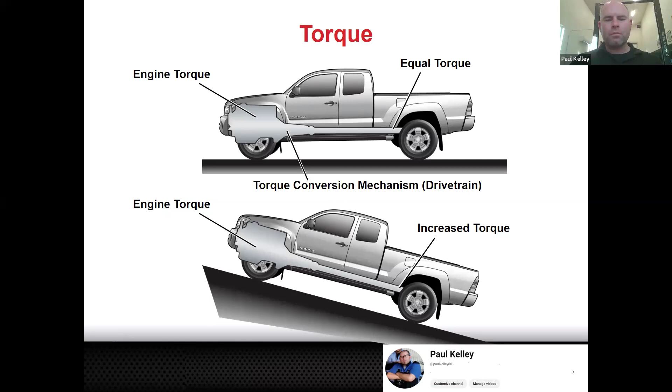If you look at first gear in that Tacoma example, if we had 36 teeth on the driven gear and 9 teeth on the drive gear, you could literally just count the teeth up - they all look the same, so you might need to make a mark on them and then count them up. You do 36 divided by 9, you'd come up with 4. That would be a 4-to-1 ratio, meaning your engine will turn 4 times before your output shaft to your transmission turns 1 time. So who remembers a little bit what would be the benefit there?

Engine turns 4, transmission output turns 1. That's extra torque—4 times the torque. But in physics, you don't get anything for free. So if you've got 4 times the torque, what did you just sacrifice? The speed. So now you have 1/4 the speed.

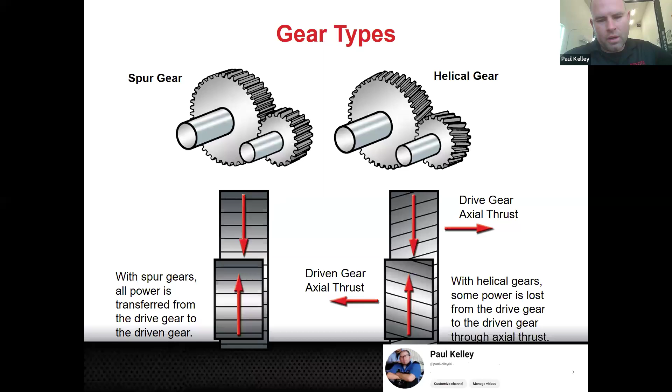And there's another type of gear - mostly we talk about it in differentials, hypoid, but we'll cover that when we cover differentials. Transmissions generally don't use a hypoid gear, a little bit different.

And then you got the split needle bearing, which is essentially the same as a needle bearing, except when we assemble the transmission main shaft, we don't have a real good way to always slide the bearings into place. Sometimes there will be a boss or a built-in gear on the shaft, and you couldn't get the bearing over the gear. So instead we use a split bearing, and it goes around the gear and then comes on as a split.

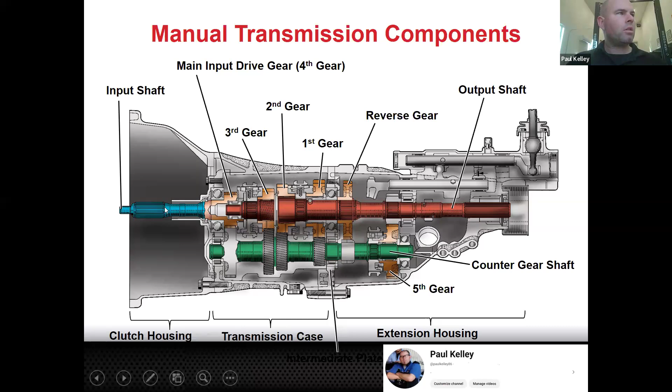That's why I like this picture, because you can see it stops right there, right at this bearing. And then actually right behind fourth, this is the bearing, and then there's fourth. It's kind of weird, it stops right here but it's sort of hollowed out. So this output shaft is sort of going inside of fourth, but it's not really touching fourth.

Fifth, however, is not actually. Fifth is on its own split needle bearing, and fifth has its own sleeve, its own synchronizer sleeve. So fifth gear would be the only one that's actually the speed gear on the counter shaft. So in fifth, it's a little backwards. Fifth, this is the speed gear that we select, and then it turns this fixed fifth gear that turns the output shaft. So it's kind of weird, but actually that's pretty typical. And then they might put on a 6-speed, fifth and sixth down here on the counter shaft.

But if you were to look at this, remember power flow would come in because the clutch is splined to the input shaft. That's your input shaft bearing. This fourth gear turns your counter shaft. Your counter shaft's got its own bearing here, it's going to have multiple. And this one's turning its own speed, so all these gears are matched. This is fourth gear speed gear, and this is fourth gear counter shaft gear.

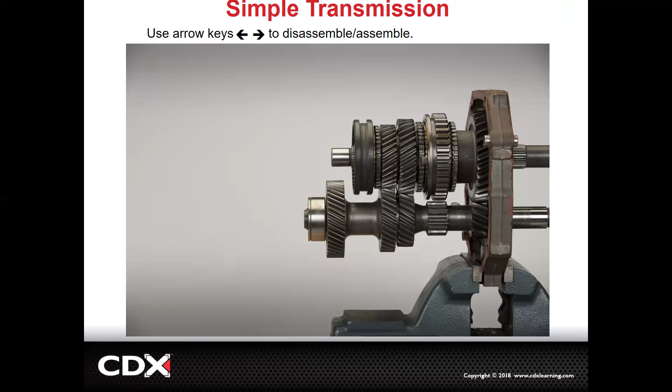And during disassembly, this is exactly how we're going to take this apart. We took it off simply because we're disassembling this one. So let's say, for example, you need to change, whatever. Let's say this is third. If you need to change third, this is what you need to do. You need to disassemble the transmission like this. So we're really just walking through the disassembly, but at the same time, I can explain a little bit about the pieces and how they work as we're disassembling.

That's why we pulled the input shaft, which also, by the way, has that fourth gear. So fourth gear is kind of weird. Fourth gear doesn't necessarily rotate on its own bearing. Remember, that's what I was saying. First, second, and third are good examples of those split bearings being used. But fourth gear is attached to the input shaft. It's just not attached to the output shaft.

So fourth gear turns the counter shaft. Counter shaft spins at whatever speed it spins, which spins all of these gears. Third, second, first, it's back here. Cool.

And then we pulled the input shaft. And then look, now we've pulled, well, what have we pulled there? We pulled, this is called a sleeve. We're going to come back to the sleeve, but now when we talk about the sleeve, you can picture it. The sleeve would be moved by a fork. So the fork slides the sleeve, but also beneath the sleeve, there's another thing called a hub. And the hub, you can see these splines, you know the hub is off because the hub splines to the output shaft. Okay, so we pulled the sleeve and the hub.

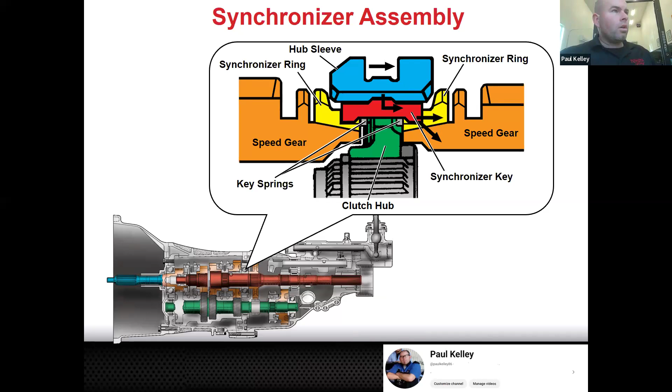The animations just can't play those. Okay, so if we were to take that, we're going to go back and forward a couple times. So if this was first gear, you can see this first gear, this is how we get our gear ratio. This is the speed gear teeth.

And then right here, see these little pointy things? Those are the dog teeth. And then right here, there's a nice cone clutch surface. That really clean cone-shaped surface is what will accept this synchronizer ring right here. When this synchronizer ring is shoved onto that cone clutch surface, it's going to make that speed gear turn the speed that it should. It's going to synchronize it.

Cool. Remember what the keys do? The keys kind of shove the synchronizer ring. They also have a little spring on them trying to expand them. And then this is where it gets a little tricky.

The hub in green sits in the center, and the sleeve can slide either way it wants. The sleeve can slide over the hub, press the synchronizer ring, and then grab the speed gear, at which point first gear is locked to the hub through the sleeve. That's first selected.

Then if you wanted to select second, you'd actually move the sleeve to the left. It would let go of these dog teeth, push on the synchronizer ring, synchronize the speeds, and then ultimately grab these dog teeth, which they'll call the splines. And that would therefore lock second to this hub, which would mean that the shaft will now turn at the second gear's ratio and speed.

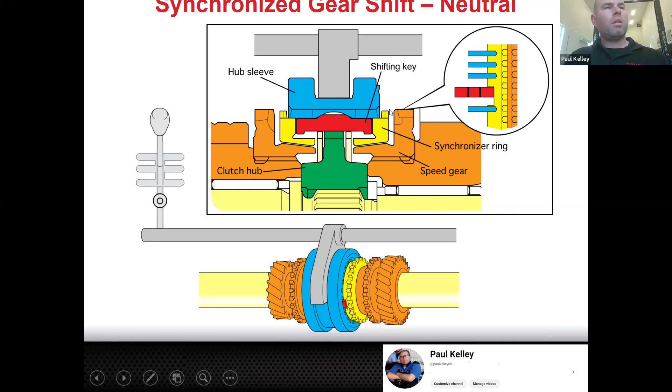Okay, so you guys could see that sleeve ultimately, through the key, pushes on the synchronizer ring, synchronizes the speed, and then ultimately the sleeve ends up way over here, grabbing onto those dog teeth. Make sense? You could see that? When it grabs the dog teeth, that's when that speed gear is locked to the hub, which is splined to the sleeve, to the output shaft. Okay, that's how it's selected.

Cool. Now there's a couple little details. One, right here, you want to notice when we're pushing on it, you can see that speed gear is in orange. The sleeve has teeth on it, and they put a little chamfered edge on here.

And that's basically so that when you bring this hub into position, it might actually bump the synchronizer ring, and it actually might bump the dog teeth like this. Like you go to shift and it's like this, you're bound up, gear bind, boom, you can't shift. If you ever have a car and you try to shift it and you go into that gear and it feels like you're forcing it, this is why.

You might just have had the sleeve tooth come right into contact with the synchronizer, right into contact with the speed gear dog teeth. But they put a little chamfer on there so it'll basically knock it down to where it needs to go. See right there? That can take a bit of effort. Initially they're gonna hit and they're gonna be like, uh-oh, but then they have an angle on them, so it's gonna go like this. There you go, there you go.

But you can feel that sometimes, that's normal. What somebody was saying yesterday, once in a while they'll go to shift and it'll kind of bind up, and then you might have to switch to another gear and then it'll go in better. That's because if you switch to, let's say this was fourth and you switch to third real quick and then to fourth, third a lot of times might spin this hub a little bit, and then the hub might line up perfectly with fourth.

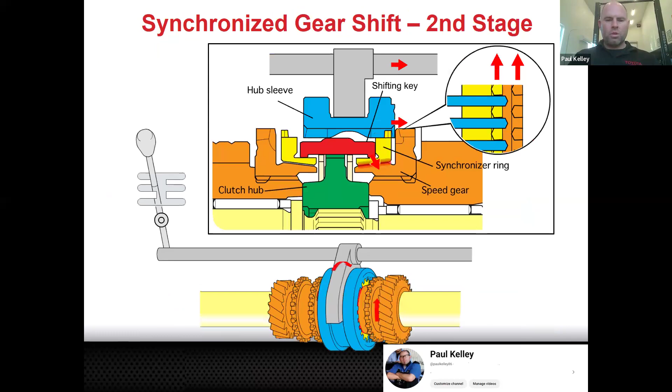Let's just say Colin is driving a Subaru, living his Subi life, and first is good, second is good. When he goes into third, a lot of times there's just a little something, just a little - and when you really try to shift fast, it'll grind third. But if you shift really slow, it probably won't grind third. That would be a notorious, perfect example of a bad synchronizer ring. Now, this one happens to be a two cone, but if we were to back up, the more basic synchronizer ring would look like this.

It's just one piece of brass with some grooves cut into it, and they're actually pretty sharp, but it's brass. So if we shove the brass onto the cone clutch, it's not hurting the steel, it's brass. Every time you shift it, this has to equalize and synchronize the gear speeds, so there might be a little tiny bit of wear on that synchronizer ring, a little wear on the blocker ring. By the way, they'll call it a blocker ring sometimes in ASE, that's more of a domestic term. Synchronizer ring, blocker ring, same part. A little wear, a little wear, a little wear.

So what Toyota did that was kind of smart was they started making the speed gear like this, and then you'd have two parts to the synchronizer. There was a brass part that would engage a separate cone clutch, and the cone clutch wasn't necessarily part of the speed gear, but its little legs would engage it, so it would function like it was part of the speed gear. But technically, if you wanted to fix this, you could do the inner ring, the cone clutch, and the outer ring as your synchronizer assembly.

So let's just say the brass continues to wear a bit, a little bit, a little bit. Third gear wouldn't synchronize that well, right? Third gear would be turning at its own speed while you're moving second gear to the output shaft. Then when you go to engage third, it's lagging, maybe third gear's not spinning as fast or whatever, and there's a speed differential. The synchronizer should synchronize the two speeds and make the engagement of the sleeve very clean - click, cool, click. But instead it's like, no, I'm all worn out.

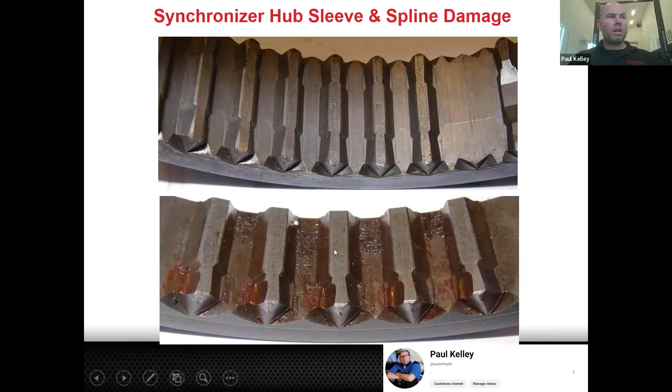But what if I were to say it tends to pop out of all gears randomly? It'd be like, what? What do you mean it pops? Then they're all worn? Well, maybe. But what about this - when you go to shift it, it tries to hold it in gear, and there's a couple other things that do as well. But if your shifter linkage is so loose that the shifter is able to swing, it can actually fall backwards and tug on the actual shifter linkage and yank it out of gear.

So Colin had a pretty cool one. His shifter linkage was like literally like this. So if you're driving and there's so much play in the linkage, the shifter can actually build up enough momentum to pull it out of gear. It could cause a pop out in all gears, potentially. So generally, grinding is going to be related to the synchronizer ring. Pop out is generally going to be related to the dog teeth, the back cut. But if it's popping out on all gears, it might be more related to the shift linkage being really loose.

Well, remember how I said it was grinding into third? What if I had a vehicle such as this Jeep, if you'll remember from last week - when I go to put it in reverse, it grinds. But if I were to take it out and drive it, it kind of grinds going into first, second, third, fourth, and fifth, and there's some other symptoms. What are your thoughts about it grinding in every gear? It could be worn synchronizer rings in every gear, right?

When we go to do a shift, what's one of the important things we need to do first? Press the clutch. If you're pressing the clutch pedal, but there's air in the system or your adjustment is too short on the push rod, your clutch will not completely disengage. You'll continue to transmit torque. That's going to make a gear clash too. That will grind, but it would grind in all gears, right? So consider the typical grinding and the typical pop out, but also consider overall, if it's happening in all gears, it could be an external factor.

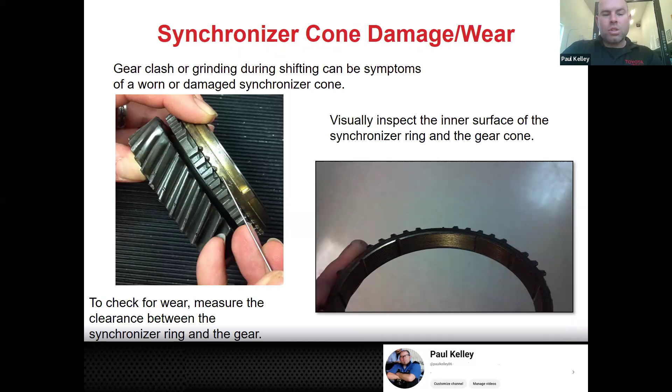Okay, that'd be a problem. But as it wears, it'll slide further and further onto the gear, and you'd get a lower and lower feeler gauge reading. So we're checking the clearance between the synchronizer ring and the speed gear dog teeth, and that will tell you the amount of wear on the synchronizer ring as well. We don't ever really factor speed gear wear because the speed gear is steel, so against the brass, it doesn't wear. The brass always takes the wear. So these are a couple ways to evaluate whether the synchronizer rings are good or bad.

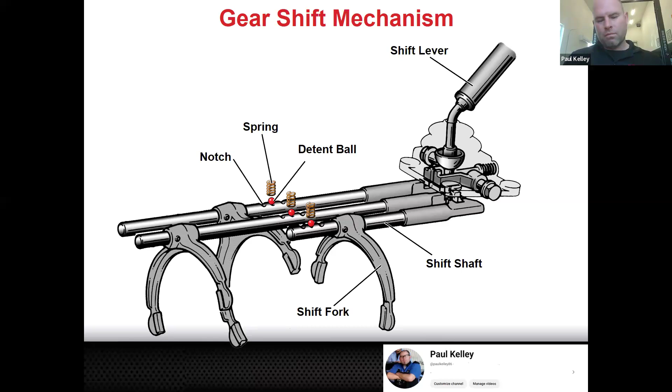See the point? All right, and then you can see it a little closer. Here's the notch, here's the detent ball and the spring. So right now that's in neutral. When you go into first, it goes back, so this ball will drop into this spot, right? The ball doesn't move, actually, the rail moves. Kind of get me? Kind of get what I'm saying?

Cool, so those could contribute to pop out. And also those are what make it feel like crisp, confident, confidence-inspiring engagement, if you will.

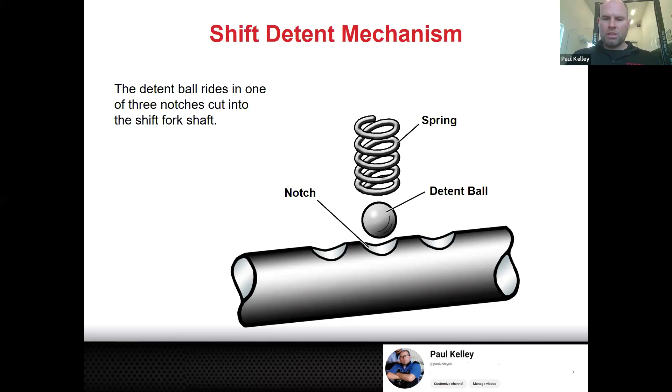Now here's something similar, but different. This is the shift interlock. The detent mechanism was for feel, mostly for feel, but also a little bit to make sure it doesn't pop out of gear. The shift interlock mechanism is to make sure you don't grab two different gears at the same time. If you had two different gears, if you had first and third both attached to the main shaft, it can't turn at both speeds. Something's going to break.

Makes sense? You're done. I even had a coworker, and I specifically recall he was late to work one day and he called, the guy, my mentor worked next to him. This guy worked next to my mentor. And so he's like, oh yeah, Frank's going to be late today. I'm like, oh okay, interesting.

And I remember specifically, he came in, he had his 99 Z28 Camaro on the back of the tow truck. So he had a little bit of a racket, I'm going to tell you. A racket meaning like a questionable ethical situation. So he bought his Camaro, but mostly he did it through his wife's name. If that Camaro ever broke, it was written up under his wife's name, but he would bring it in, he would assign himself as the tech, and he would get paid under warranty to fix it.

Okay, so you see where I'm going with this. He drove that car. You know the saying, he drove it like he stole it. I would even go further to say he drove that car like it was under warranty and someone else had to pay for fixing it. And he got paid to fix it. So there was some things there.

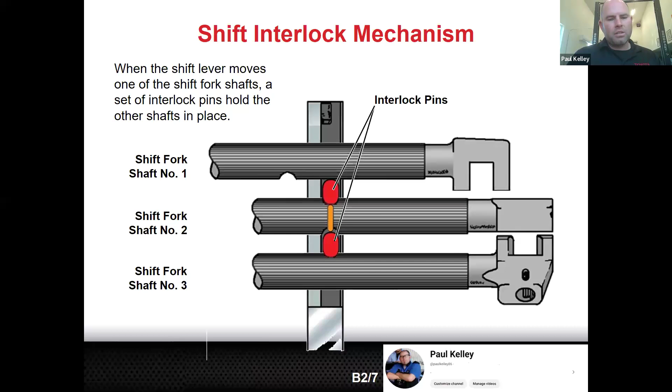Third will push the pin into the 1-2, and the other pin into the shift fork for 5th and reverse or 5th and 6th. But at no point should it ever be able to move both. It's not supposed to move both. Moving both would be exactly what happened to Frank. He had 2 shift rails out of the neutral position. This shift lock mechanism should prevent that from ever happening. It should only ever allow 1 rail to move. You want this rail, no problem. You want the next rail, you got to center it, you got to center the middle one. But he actually broke the interlock pin, snapped it. Can't imagine why, but he broke it, and it was literally in 2 gears at once. So if a transmission is able to get into 2 gears at once, you can suspect the interlock mechanism. It's very simple, it's literally the pin. That's it, so simple.

So a missed shift could be very damaging. We were getting a lot of 86s in a while back, and they would have the rocker arms blown off of them, but it was always on a manual. We think what was happening on a lot of those was they would miss shift. If you're in first, second, third, and then you go to hit 4th and you miss and hit 2nd, you'll over rev the engine. You have a rev limiter, and it'll do fuel cut, but the fuel cut won't stop the engine from being over revved. If you shift into 2nd at 70 or 80 miles an hour, that's gonna over rev it mechanically. Fuel cut won't stop that from happening. So if you do a misshift, you can over rev an engine.

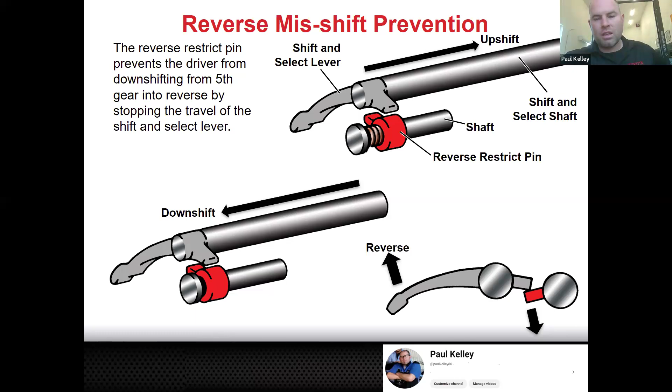But do you want to know the only real way to guarantee that someone doesn't miss shift? You eliminate the manual transmission. You then go to an automatic, and when the customer gets the paddle shifters, the sport mode, and they try to shift into the wrong gear, the computer just says no. So they've tried some things because they've had some damage with this. There's no perfect way to get the manual to be dummy proof, if you will, but they will do a few different little things.

Back in the day, reverse was a non-synchronized gear. So if you were slightly rolling and you tried to go into reverse, it would grind really bad. People were kind of annoyed because sometimes when you're driving, you might be going one or two miles an hour and try to catch reverse. So what they did was they put in this pre-balk mechanism, which all it is, is they just synchronized reverse. First, second, third, fourth, fifth, and even sixth was synchronized, but reverse was not. And that was kind of like, well, it grinds sometimes and it's annoying - I don't want to hear that.

Cool, we'll synchronize it. So actually, reverse can be synchronized on some, and that's why you can go into reverse if you're rolling just a little bit. That's what this whole mechanism is. So it's pretty neat.

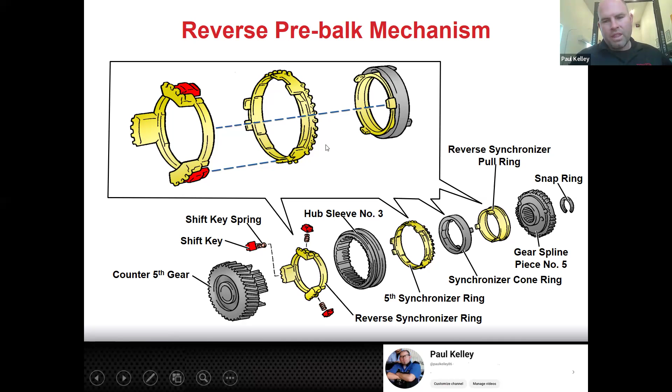And then that's transmissions. Now you're going to see transaxles are very similar, but there's just a couple little basic differences. Main difference: our input shaft drives our output shaft. We don't really call it the counter shaft, but you could, because it does spin counter - it spins backwards. But you notice there's no input shaft, counter shaft, output shaft - it's really just two shafts. Additionally, your output shaft has a drive pinion on it, and your drive pinion is going to drive the ring gear of the differential directly. So there's no drive shaft - it's the output shaft driving the differential directly right inside the transaxle.

Beyond that, it's kind of similar. Because we have the differential in here, we may use a different type of fluid, sometimes the same fluid. On some of the older ones, they had a type of fluid for the transmission part of the transaxle and a different fluid for the differential part, but that's going way back in the early 90s. Now it's all just one - not a real big deal. It's pretty similar to working on a manual transmission, except it's just got a little differential in there. Not a real big thing.

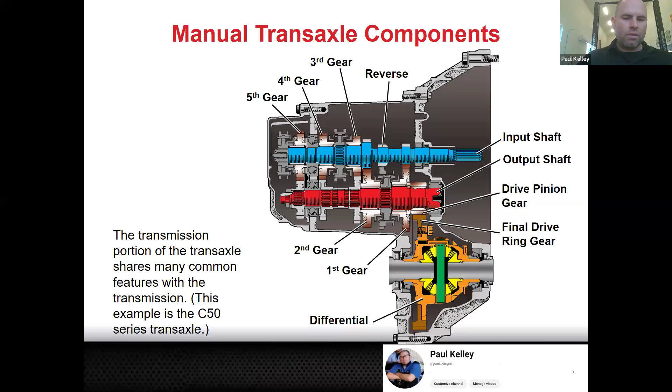All right, so if we go and look at that differential itself, you guys can see this is going to be your output shaft. We may call it the pinion, and that output shaft pinion is going to drive this brown gear, which is the ring gear. Now they'll call it a final drive because that's the final gear reduction. So what's a little bit of a pain is it's harder to understand, because if you're in fourth and that's one-to-one, you get one RPM on the input and you would get one on the output shaft, but then it goes directly into the differential. So the differential has its own gear reduction of about 3-point-something or 4-point-something to one. So it's kind of harder to tell what's one-to-one because it's all turning. But other than that, not a real big deal.

That's entirely a differential discussion, but I want you to remember it for now. We've got a full-blown differential in here, which we're covering next week. Back in the day, this differential was driven by hypoid gears, which would mean we need a special type of oil. Now they typically just use helical cut gears, so it's not even really any different than regular gear oil for a transmission.

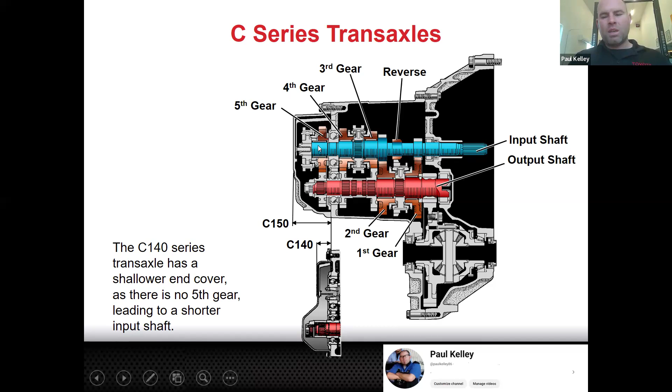But then as we got a little bit further, we got into the 6 speeds. You see that this is a little more traditional - it looks like 5th and 6th were more planned. Whereas back here it was like, well, it could be a 4-speed, and then bang, they could add this on and have it be a 5-speed. The 6-speed was designed with 5th and 6th in mind already.

So in the 6-speed, you've got reverse, and 1 and 2 are still on the output shaft. Pretty much everything else is on the input shaft. The way it works is going to be very similar. And then here's the E, and we got several options. The way it works is going to be similar, except, and some transmissions do this but not that many.

A lot of transaxles will actually have a little oil pump. So in a typical transmission, the gears are just splashing in the oil and they lubricate themselves. In a transaxle, sometimes the shape of it's a little awkward. Sometimes we've got to pump oil to the differential, but we also have to make sure the gears are being lubed for the transmission side. So we may put a very basic oil pump in here, with a simple strainer - it's not really a filter, it's just like a screen.

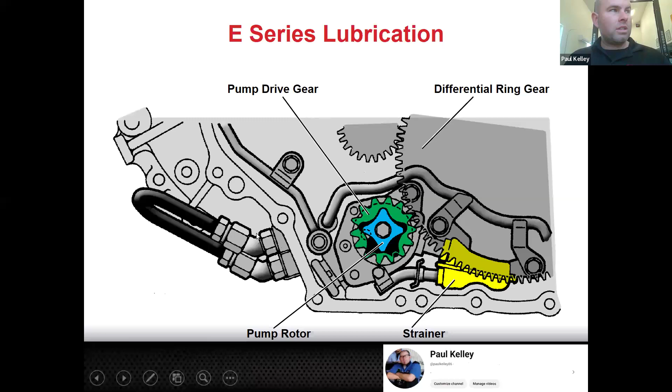And this pump will be driven sometimes off the differential ring gear. So as long as the differential's turning, this pump will be turning, and it'll pump some oil to the various locations it should be. You might even occasionally see a little transmission cooler. So that's one slight difference.

And then the reverse is actually the same. The reason I combine these is because some of these help you understand a little better. But here's your reverse gears. In this transaxle specifically, they're not constantly meshed, and that's pretty typical. If you wanted to engage reverse, you'd actually need to move this gear up and literally spline it to this gear, and that would make some noise. That's why you really need to do it when you're stopped. So all the gears are constantly meshed using synchronizers, except generally reverse. So reverse actually is a sliding gear, and that's why reverse will tend to grind.

So if the customer says, sometimes if I'm rolling and I put it in reverse, it grinds, you can't fix that. There's no way to fix that. It's a non-synchronized sliding gear, and we have to actually engage it.

See, this is part of reverse, and this one over here is part of reverse, but they don't touch. So if this one's turning clockwise, this one's not turning at all. If you bring this gear in, this will turn clockwise. It'll turn this gear counterclockwise, and it'll turn the output shaft clockwise, which turns the actual differential counterclockwise, and that's why it's in reverse.

So it's kind of, we add a gear in the mix, and that's how we change direction. That's what I'm saying. The input shaft doesn't change direction. The output shaft actually does.

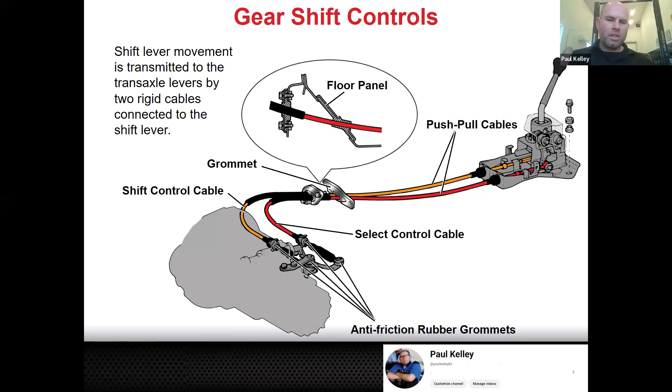The positives and the negatives: the positive is we can mount it wherever we want. The negative is these cables could require adjustment. If you had a problem with an adjustment on one of the cables, it may make it so that you can't catch any of the forward gears. If it won't push far enough, you won't be able to click first, third, or fifth. If it won't pull rearward enough, you won't be able to click second, fourth, or reverse.

Should you have to adjust these? Not really, they're adjusted from the factory. The only reason you'd have to adjust them is if you unadjust them somehow. So there's a procedure, but it's not real common. When you go to pull that transaxle, that's why you're going to be pulling these little safety pins and popping these cables off and then folding them up out of the way, because that is your shifter right there.

In a rear wheel drive, the shifter probably comes up through the floor. So you're actually probably going to have to undo the shifter. That's something we got coming up towards the end, we'll show you a lot of the different procedures that we do.

So here's what that shifter looks like down on there. It's almost like a little shift drum type of thing, like a hammer. When you move this way, that's going to be... that's like this. Then when you go this way, that's going to be like this. Click, click, click, click. Depending on what you do, it's going to grab each one of these gates.

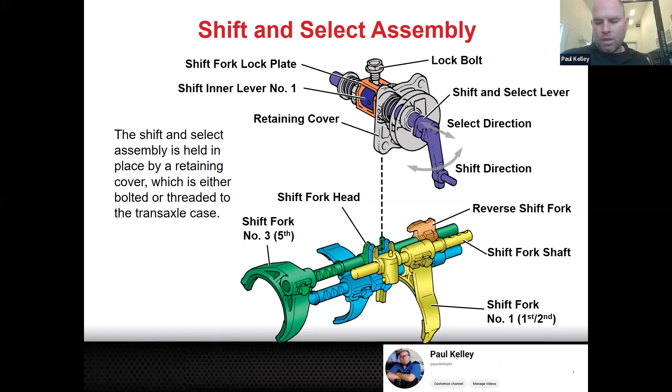Cool. And if you look right here, see these 3 things? Those are the shift detents. That's what gives you that crisp feel. That's all the same as the transmission, none of that's really any different. They do a better job on some of the shift fork things here though. So there's your detents, and a lot of times you can actually access those from outside.

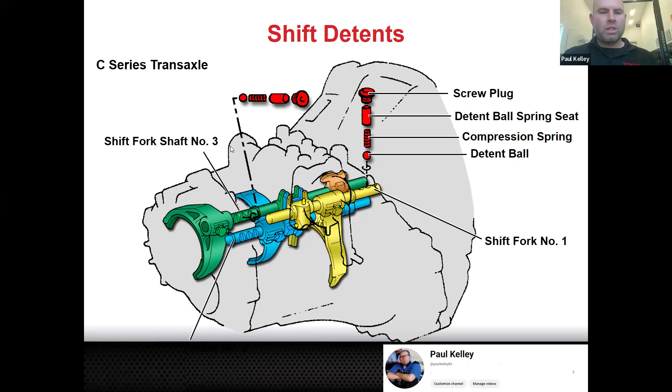We've seen a couple times where someone sees a plug like this and thinks, oh, what's in the plug, maybe they add fluid there or something, and they take it out. It pops out the spring and the ball, and next thing you know, the shifter's sloppy. You could actually service the detent externally, you don't have to take it apart. So that's kind of a cool little detail.

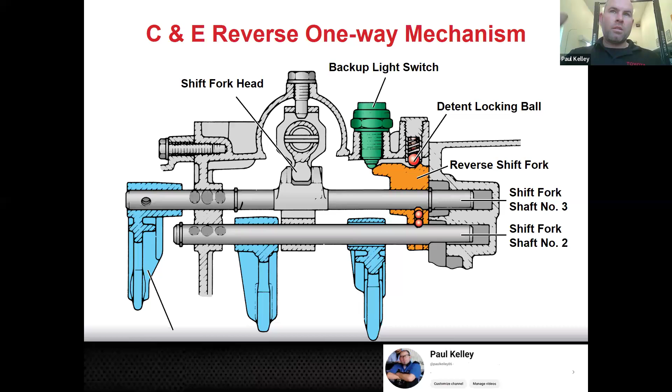And if you look, this is pretty much the same as an interlock, it just looks slightly different. So this is the interlock mechanism. And again, the reverse will have its own little one-way mechanism to make sure that when we swing that idler gear in, it can't be in fifth at the same time.

Not a real big deal, it's again similar to the transmission. You obviously can't be in fifth if this gear is moved - if this shaft is moved, you can't move this shaft, right? It's just an extension of the interlock. So that's how you know you can be in fifth, but not if you're in reverse. You can be in fifth, but not if you're in third, right?

Not a big deal. If you want to shift, you got to center this, and the ball is going to have to drop in, and then you can move this shaft. Right now, you're not going to be able to move this shaft because the ball's not there. So you got to let it drop down in, then you can move that shaft. Same as the interlock.

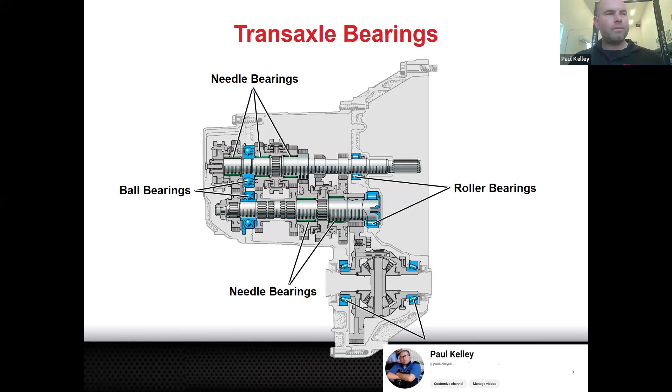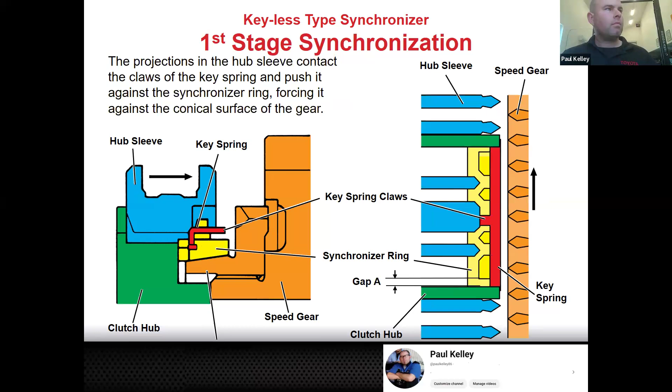Why would we do that? What is the purpose of that brass synchronizer ring? I'll call somebody. No.

Okay, purpose of the brass synchronizer ring - if you haven't caught it yet, it's the same as the transmission. We need to get this gear synchronized to the hub speed so that we can slide the sleeve over it. And now the sleeve would be click-connected to the speed gear, which locks it to the hub, which locks to the input shaft. So if they're turning different speeds, that's why we need the synchronizer ring.

You'll notice this one shows a pretty good image of the back cut. So here's sliding the back cut in - that's going to be kind of hard to get in, which is good, because once it's in, it's going to be hard to pull this through. And that's why we don't have the pop out primarily.

Pretty good. And then just keeping in mind, the gears generally are splash lubricated, but sometimes we use a pump with a little screen to lubricate some stuff. This also talks about what type of lubricant. Depending on the model, it's generally going to be something like a 75/90 or 80/90. This is all gear lube, so it's more like what you'd put in a differential. And that kind of makes sense because it is a transaxle and it does have a differential. So a lot of transmissions can use this too, but some of the transmissions back in the day would use more of a thinner basic oil, whereas transaxles would use a gear lube because they have the differential in there. So it can vary.

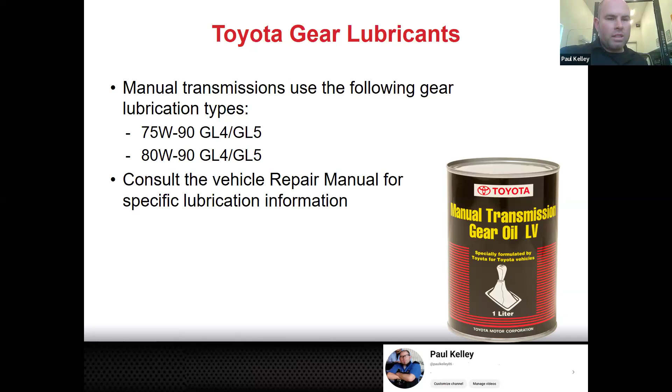Also, this is no longer about transaxle specifically, but just generally. When we go to seal these, you're mostly not going to be dealing with a lot of gaskets. It's going to be more like RTV, FIPG type of thing. That makes it tough because a lot of times you've got shafts and gears, you're trying to spline stuff, you're trying to bring the case together. When you're trying to set the case, it makes it even more difficult when you're dealing with liquid RTV, like FIPG. With FIPG, you really want those cases to be set and the bolts in and at least tight within like 15 minutes. That's tough when you're trying to spline things together and shift shafts and rails and junk.

So a lot of times what they'll go to is less of the RTV, more into what we call an anaerobic sealant. So ASE may ask about anaerobic sealant. An anaerobic sealant is a sealant that cures in the absence of air. What do you think that means? That means it's not like FIPG. You can apply it and leave it sitting there all day. Now, I wouldn't probably leave it all day, but you could. It won't actually cure.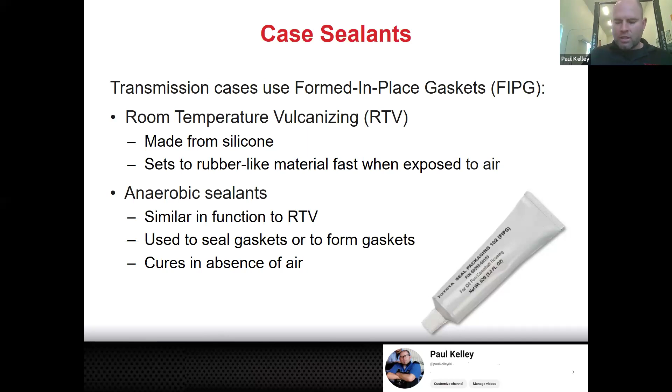So does that take some of the stress off of you? You're like, oh yeah, let's put the anaerobic sealant on the case, and then assemble this, and don't even worry, it can sit there, chill. When did it start to cure though? What do you have to do to cure it? Does nobody know? What's it say? You have to actually bolt the case together, and then it's going to remove the oxygen. It's anaerobic. As soon as the oxygen is removed when the cases are together, then it'll cure. As long as it's exposed to the oxygen, it just sits there. It's pretty cool. So we'll use some anaerobic sealant on these transmission cases because it's really mostly going to help with making sure that we can spline everything and still have a good seal.

Cool. So when we get into some of the diagnosis here and the service, I'd like to clarify a few things. Let's say, oh yeah, I want my transmission rebuilt. What do you mean by that? That's kind of a hard thing to define. It's well defined in an automatic. In an automatic, that means you're going to get new clutches, new seals, new gaskets. You're going to clean the valve body. You're going to inspect all the hard parts. You're going to make sure all your measurements are in spec. That's exactly what an overhaul means.

In a manual, does that mean you get all new bearings? Does that mean you get all new synchronizer rings? Does that mean you're getting sleeves, or are we going to run the sleeves? Does it include speed gears? I don't really know, so it's not really a good term. I would say it'd be better to specify exactly what you did. An overhaul is very vague. So at a minimum, I would say if you said overhaul, that's going to be bearings. I don't know that it would really include synchronizer rings, and seals and gaskets, I guess.

But with that being said, we don't typically request an overhaul for a transmission. You don't rebuild the transmission. If a manual transmission has an issue, you're probably just going to go in and fix the issue. Makes sense? So if it's grinding going into third, you're probably going to go in there and fix third, but also inspect it. And if that's it, that's it. Or if you had an input shaft bearing, you're probably going to be doing input shaft bearing.

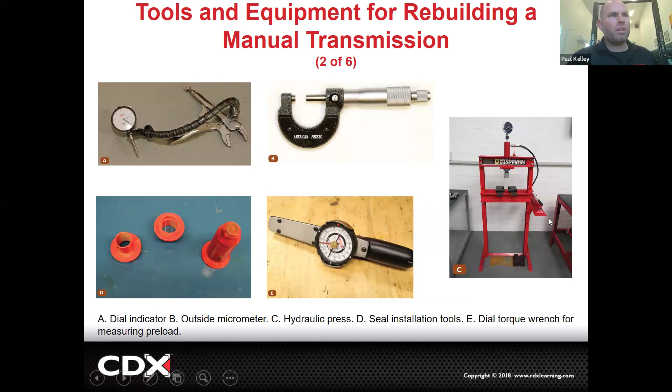Cool, here's some of the tools you're going to use: dial indicator, micrometer, maybe some various seal installation tools, an inch pound dial type torque wrench. The press is a big one, so we're going to use a lot of press work. That's how the work looks. You might have to hang an engine to pull a transaxle. You might have bearing race drivers, maybe even some slide hammers and things. Bearing splitter is going to be common, gear puller is going to be common.

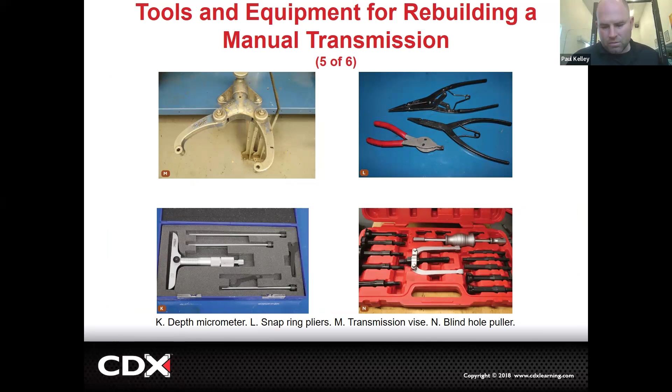So these are the types of things we'll be doing. This one's a nice fixture, snap ring pliers, depth micrometers, maybe even some different types of pullers because it can be kind of difficult to pull some of these bearings, right?

But if you just go on, like I bought a Hyundai once and it had a horrible noise and I was going to fix the transaxle, I couldn't find a rebuild kit anywhere. If I went to the dealer, they'd sell me individual bearing after individual bearing. But I did find the company who made the transaxle sold a bearing kit, and that was the rebuild kit—just bearings, no synchronizer rings, no seals, nothing. The problem was that bearing kit was like $500 or $600 just for the bearings. So I put a used transaxle in there for like $500, and that was it, it was done. So we don't really go in here the same as we do automatics.

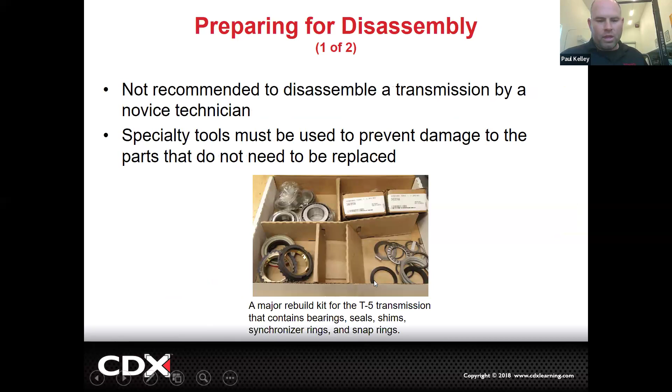That's kind of the point. Now, when you prepare to do this work, it looks like a puzzle. It's something you can probably kind of figure out, but you're going to make mistakes. You need to really be following service information. Like this, we talked a lot about a T5, an old manual that was pretty common back in the day. I think Tremec might have made it, 5-speed, might have been Borg Warner, whoever made it, I don't remember. But you're just going to follow the steps: pull this, remove this, separate. It's not that different than an automatic, except it's a lot more simple, right?

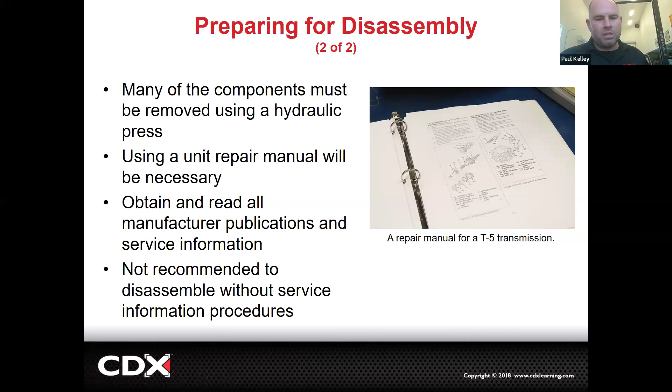So here's some of the parts. Throughout the disassembly, we've got to keep everything really nice and organized. So like later, you're going to see somebody flip this—one of these was installed correctly and one was installed backwards. And when we get into there, you're going to have to pull gears, right? You have to have the shaft out, then have the shaft at the press, and you're going to use the bearing splitter to pull gears. If you put something on there wrong and don't realize it until you're going to reinstall it, it can be a lot of work to separate and pull those gears back off.

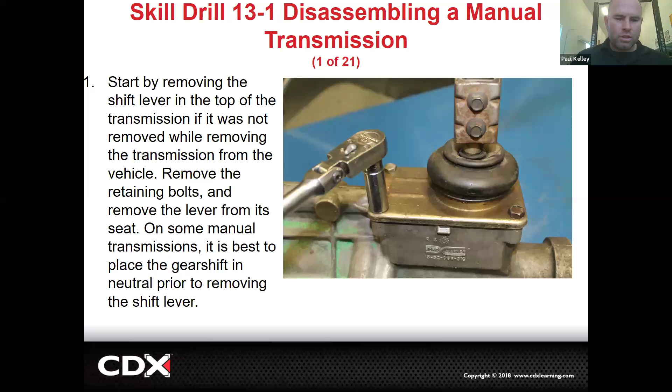Cool, so even just pulling the shift tower—some of these I'm just going to skim through to get you understanding what our service is going to look like, because you're all going to do a front wheel drive and a rear wheel drive, right?

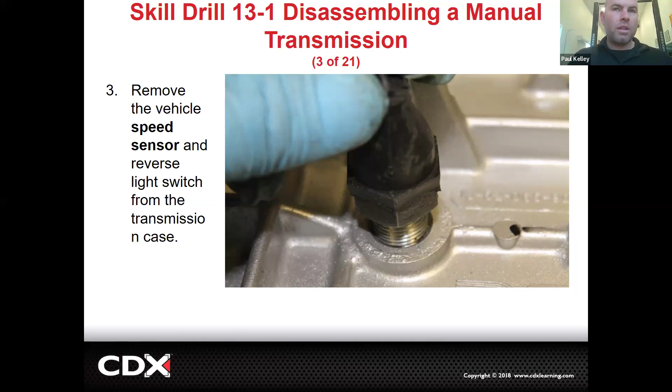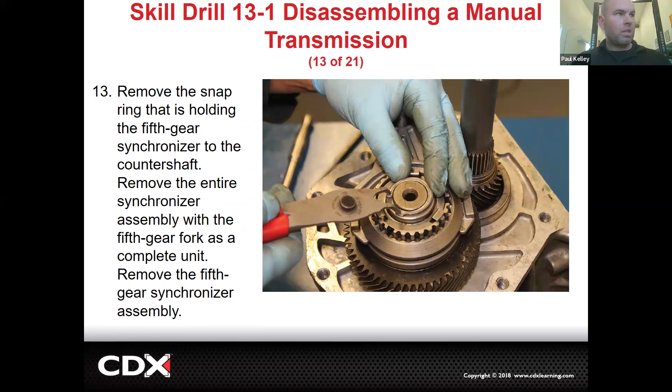To get it out, sometimes you got to deal with snap rings. Snap ring pliers are going to be a must. You might even have to pull fifth gear, it's kind of common. You might have to pull a snap ring off, and sometimes you can slide it off. Other times there'll be holes, and you have to actually use a puller. But if it's a gear that's on the outside of the case attached to the shaft, you'll probably have to pull it to get the shaft out.

That'd be pretty normal. This one, for example, has a tapered roller bearing right here, and this race makes it kind of nice because, like with an engine, if that crankshaft spun that bearing, that would actually damage the block. Well, what's kind of nice with this, we use a big bearing race. So if we had a problem with this bearing, we're not real worried about the shaft or the case because the bearing rides on an inner race and the outside of the bearing rides on an outer race. So the shaft and the case don't really get damaged on these. That's what's nice. So as long as we do a new bearing and the bearing comes with the races, we're good, we're not super worried.

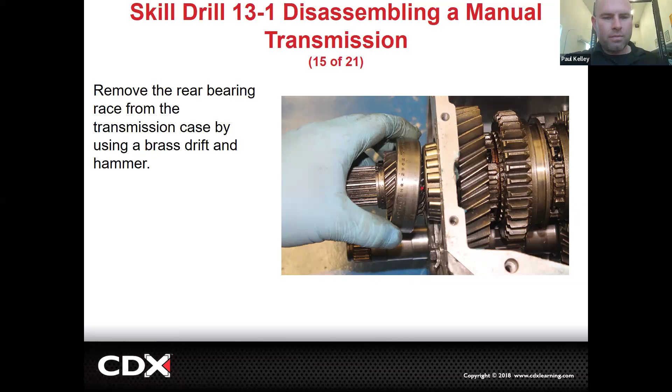There's one ASE concept that they would ask about. A main shaft bearing journal was a little bit damaged. What should you do? It's not a big deal, we're gonna put a race over that. Makes sense, the race is going to be the new friction surface. It doesn't have to have a perfect input shaft for the rollers because the rollers don't touch the input shaft. So there's a lot of that type of stuff.

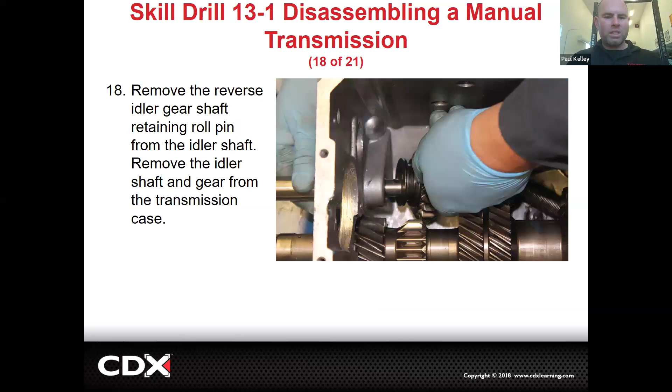Sometimes it'll tell you to put it in a certain gear. So in this one, you got to put it in third and then tip it out. Now, this is specific for that T5, but once this is out, the work is drastically different. So you can see we're pulling the last few things off of this, including the counter shaft.

And then if you're going to do the work, it's going to look like this. So let's just say there's a problem with, I think this is probably third. This is most likely first. If you got a problem with first and you need to get to first, you may very well need to pull. You're going to do a lot of work coming up here on the press.

To start, actually, we need to pull the snap ring. Oh, this one, you're lucky, we got to pull from this side, so it's a little easier. Sometimes you pull from one side, sometimes from the other. Pulling that snap ring off.

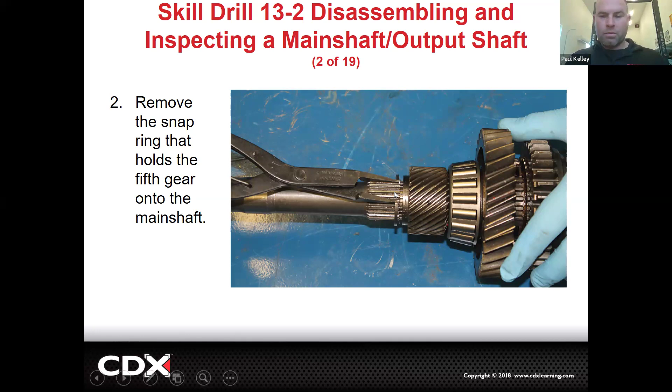This snap ring is one-time use. Could you get away with it? Maybe. Could you re-squeeze it to tighten it up? Possibly. But per the manual, if you pull one of those snap rings off, you're supposed to put a new one on there. Just so you know.

And then when we want to pull that gear, you see we've got a bearing splitter right here. So we install the bearing splitter, you got to sort of slide it under the gear. See how it's nice and flat and it's supporting that gear on like a good 10 plus teeth over here and 10 teeth over here. It can take that. You don't want to have it just barely catching the edge of the teeth, you'll chip the teeth. Makes sense. So that bearing splitter, we got to size it, kind of snug it up. You can tighten up the nuts and bolts and it'll hold it pretty well.

And then you're literally just going to go ahead and press the shaft out from the center, and you can see it's pulling it up. It's pulling the bearing as well. By the time you pull that, the bearing's junk. You really can't expect to pull a bearing and reuse it. So once you go in there, you're getting bearings. That's why at a minimum, you're going to do bearings. If you do new bearings, but you're also really going for the speed gear down here, you can probably do that and get a speed gear and the bearings.

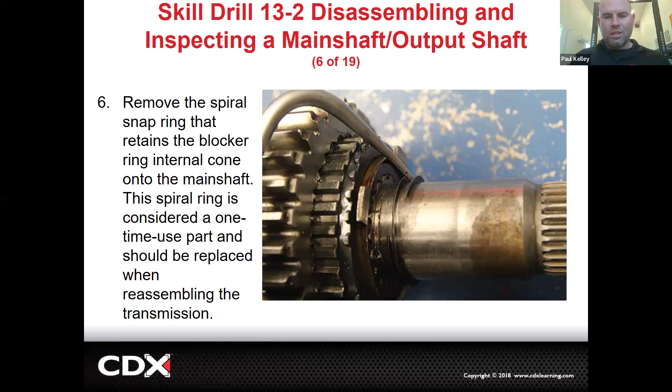But if you don't get the bearings, you're going to need those, right? Sometimes they have spiral snap rings. Here we're getting at this blocker ring right there. So let's just say this was the first gear blocker ring. If it was grinding going into first, all you do is press it far enough apart to access that blocker ring, put a new blocker ring in, and then you're good to go.

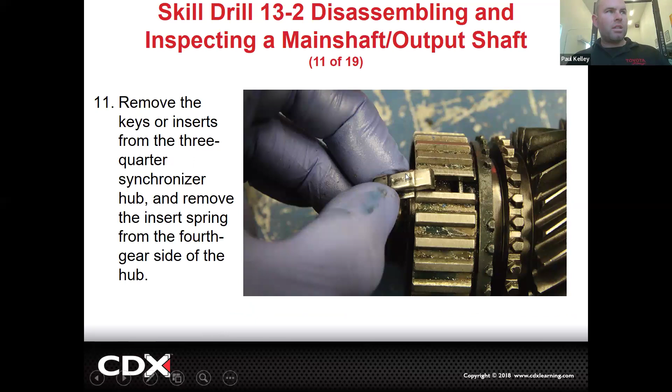Cool. So it's not exactly rocket science, but you have to pay a lot of attention to which way things come apart. And we're going to disassemble, keep these keys in order, disassemble more. Ultimately, when you get to the end and you're pressing these, you're not going to want this main shaft to fall on the ground. You've got to kind of catch it as you disassemble.

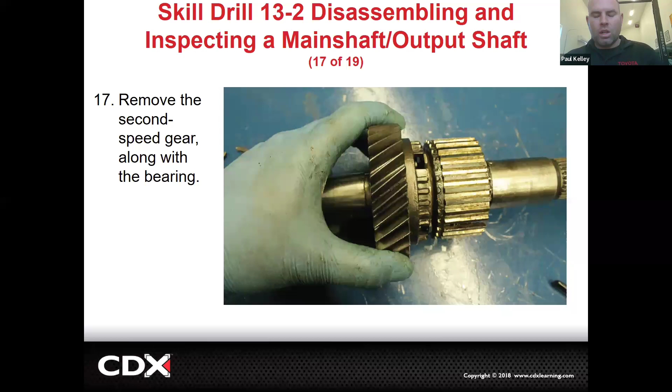Right? So remember I said a lot of your work is going to be on that main shaft on the press, looking at these individual parts. Cool, and that's the main shaft right there. Then the counter shaft - it's kind of the same.

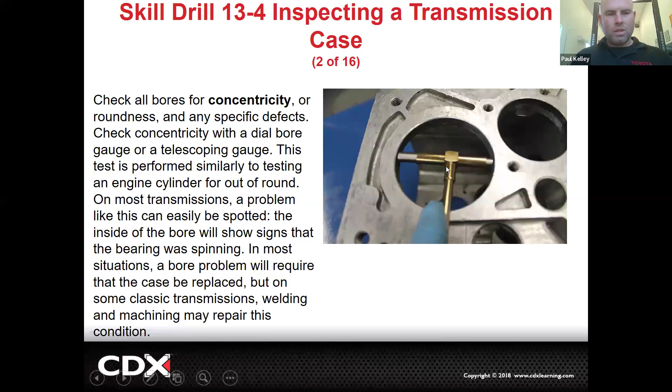Snap rings, gear splitters, using a straight edge to check the case, using a feeler gauge to see if it's warped, right? Simple stuff. Checking these bores to see if they're out of round or worn, which they don't really do. Checking the threads to see if they're clean. Looking at the case to see if you see any cracks or damage. Looking at your magnet - the magnet will catch any of the larger debris. If there's debris on the magnet, you've got to clean the magnet. Scraping it with a plastic scraper if it's an aluminum case, getting ready for new FIPG, pulling the old seals out.

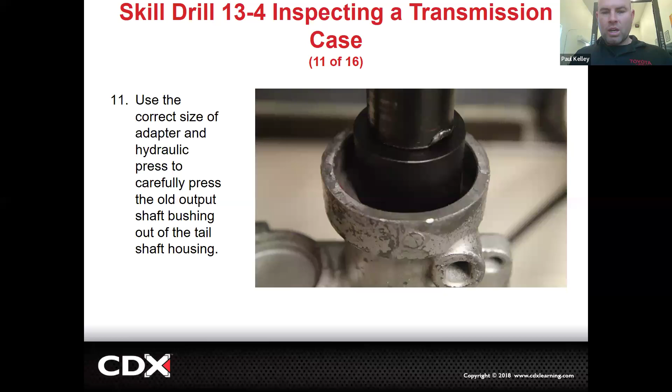Here's a bushing, right? If you wanted to - that's an output, that's a bushing for the slip yoke. To change that bushing, you've got to press it out, inspect it, drive it in, drive the new seal in. Not exactly rocket science. The new seal right here - see this lip? That rubber lip is going to ride on a spinning shaft. Do you think that rubber lip should be clean and dry? We should probably lubricate that, right?

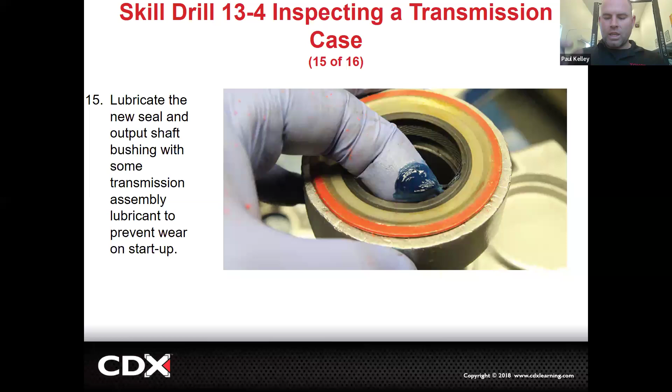So just not real complex things. If we put a new output shaft seal in and we put a little lubricant on that lip, the shaft is going to slide easier. It's going to be less likely to rip the rubber.

A vent is a good one. Make sure the vent is not plugged. Anybody think they could guess, if a vent was plugged, what the customer concern would be? Anybody know? Plugged up vent.

Transmission fluid gets hot, it expands. It needs to be able to push air out. If it can't push air out, it'll build a positive pressure. It could tend to push gaskets out. A clogged vent will cause multiple leaks. A clogged vent is similar to a PCV valve that's not working. If you have various leaks on a transmission, check to make sure the vent's not clogged. Cool, so that's a good ASE concept.

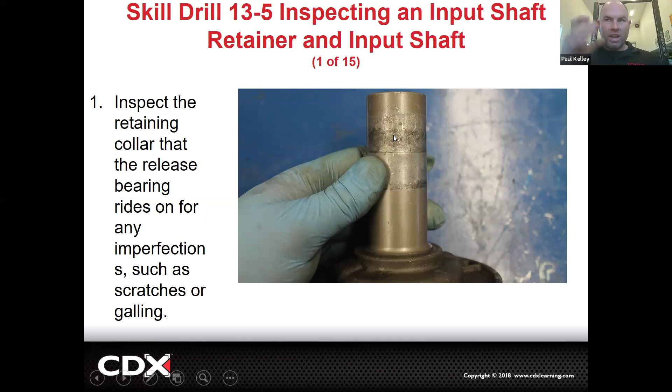Right here, we actually have this - the release bearing collar and sleeve. So this is a little bit rough. We might be able to polish this, or we might have to replace it. That's because the release bearing has to slide across that. If this was a bearing where the race gets pressed onto the shaft, it wouldn't be a real big deal, because the race stays in place. But the problem with the release bearing is it has to actually slide across that. So we need to clean that up, if not replace it.

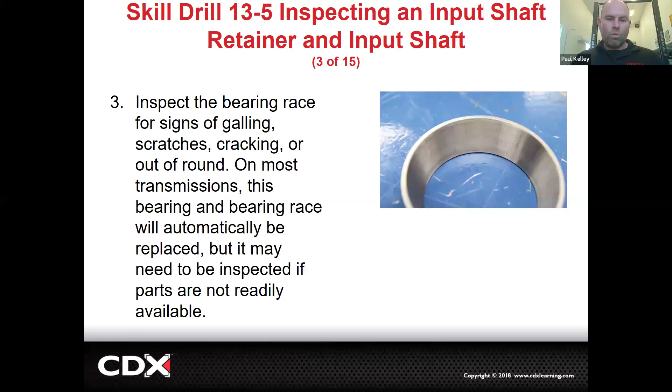Also, sometimes there's a bearing race, or there's even sometimes shims in there. So one of the things you'll see - we're going to check end play. That's one of the ways we control the end play. Cool, so we're changing the input shaft seal - not a big deal, but drive the new seal in, make sure it's lubricated. Here are shims. This is a lot of times what it's going to take to set the correct preload on the bearings. Generally, we're reusing the same shims.

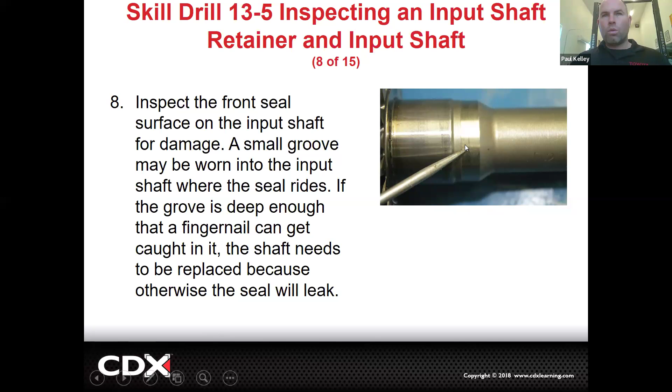Inspect this surface. If this surface is scored or damaged, that seal's not going to seal. So a new seal is going to leak, just like the old seal leaked. Makes sense? If it's pitted or scored or has seal-type damage, that would cause a leak.

We're visually looking for broken teeth. These are the dog teeth. So these are the ones we'd want to look for, like the wear for the back cut, that back taper. These ones don't look worn, but if they did, we'd want to replace it. Because if we didn't, and these were worn, can you guys remember what would happen if this back cut was worn? You've got to know that.

That'd be a pop out. That would pop out of gear if these teeth were worn. That's what that would do. Same if the teeth were worn on the sleeve, right?

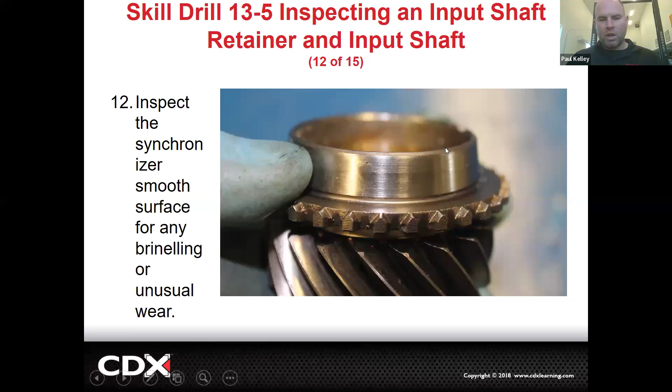Checking the input shaft, making sure that's clean. Looking at not only the teeth, but also the cone surface. That can't be messed up because that's going to cause problems with the synchronizer ring. Looking right here, this is where the pilot bearing rides. Pilot bearing goes right on the end of that input shaft.

Now we're talking about the output shaft and counter shaft. Again, we're looking at all the gears at these bearings. We generally should already know if one of these bearings is bad based on what type of noise it makes, but you also are going to inspect them.

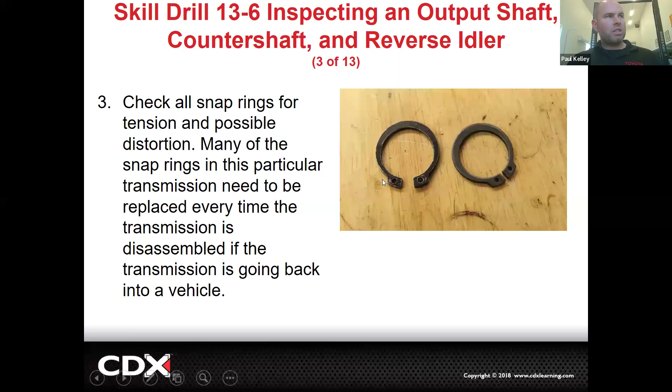Again, this snap ring is used. That's junk. Get a new one. Any snap ring and circlip and whatever, those are one-time use. Seals are one-time use.

Washers, we want to check those, like this is a thrust washer. If it has excessive wear, we'd want to replace that. Making sure on those needle bearings or on those split needle bearings, we need to make sure this surface is really clean. If this surface was messed up, it needs a main shaft. If this surface is good, we're probably just going to do the bearing. Looking for cracking. And sometimes reverse gear has a brass bushing, so we're inspecting the brass bushing.

And then obviously, when we do this transmission work, we're always going to replace gaskets and seals. We're going to do a lot of cleanup and prep. One of the things that you don't want to have is you go in and you fix that transmission for a grind, and then it comes back with a leak.

Because if it comes back with a leak, remember, there's no transmission pan typically. You're probably going to have to pull the transmission out and split the cases again and clean it up and then reassemble it. So be very careful about your FIPG or your anaerobic sealer and your gasket prep and making sure there's no oil running across the metal surface.

And there's a lot of, it's not rocket science, but there's a lot of things that you have to make sure.

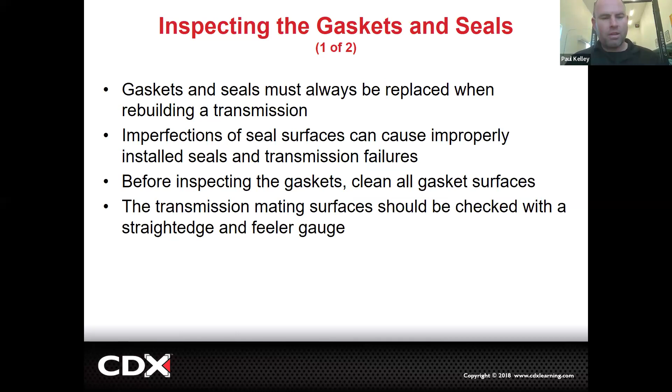And yes, Jimmy, I see you did say gear pop out. You got that right. Good job. There's a lot of stuff that we gotta make sure is good to actually be able to successfully fix one of these. Maybe not quite as much as what's going on in automatic, but it's still, there's some stuff.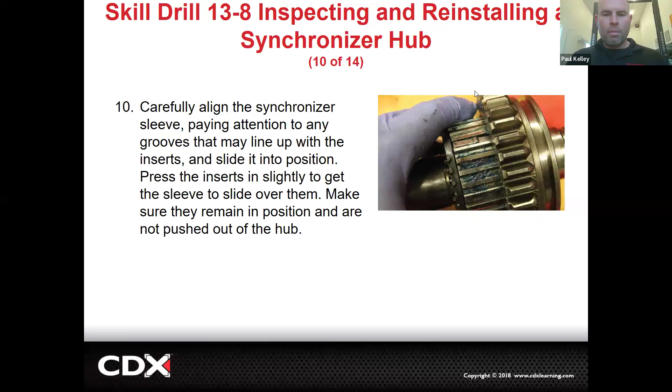Checking the springs. Sometimes we'll lube those up with like a transmission assembly lube, petroleum jelly, getting the springs in place, getting the keys in place, getting the synchronizer rings in place, getting the sleeve over top of the hub while getting those keys in place can be a little tricky.

But then snap rings. I mean, this is what the work looks like. Checking the clearance between the synchronizer ring and the gear. That's going to show you if it's worn or not. But I probably would have done that on disassembly, right?

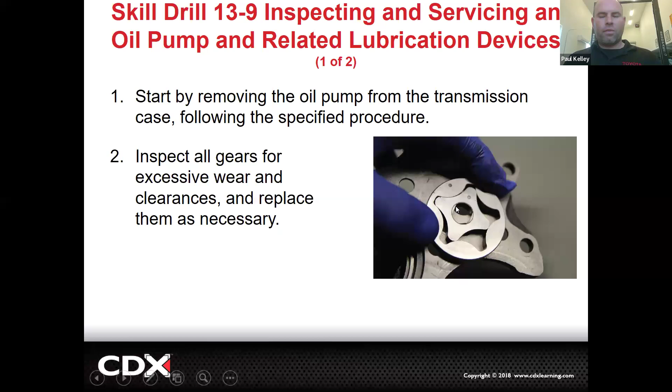So this is the oil pump. We don't do a lot with the oil pump, but you could take it apart and inspect it. There could be some tip measurements, tip clearance. You could lay a straight edge across it and do face clearance, but I don't think they're going to ask much on the ASE about oil pump.

But if you want to know more about an oil pump, we did a lot for automatic transmission and a lot for engines, right? And sometimes they even have a little pressure regulator.

Now, shift forks are interesting. There's a very important part right here. What I want you to remember is when you're driving, this sleeve is spinning. This fork, this rail is connected to your shifter, and this fork is connected to the rail. So if you think about this, ready?

What if you were to leave your hand pushing forward while in fifth gear? You're actually pushing this sleeve, pushing this rail rearward and this fork rearward against this sleeve, riding against this part of the sleeve. You can actually wear a fork down or wear a sleeve down if you're not careful about leaving your hand on the shifter with a lot of weight. This one has plastic inserts to allow that sleeve to spin and slide across it, not wearing out the aluminum or the sleeve. But if you do an overhaul, this is something we should replace.

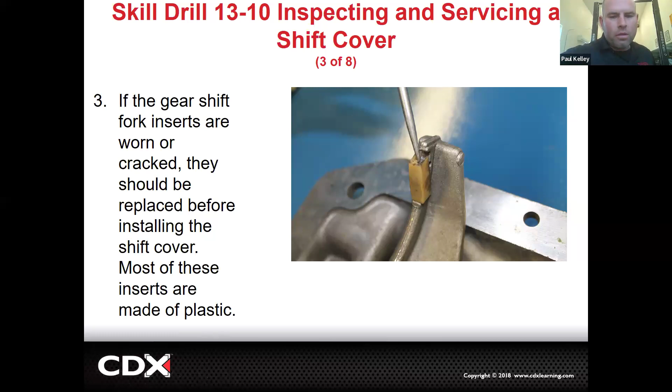Now here's what the ASE would never accuse the driver of being a ding dong. What the ASE would say is you look at a sleeve and one side of the fork and one side of the sleeve are worn out, like maybe this side of the fork is worn thin. What could cause that? A customer resting their arm on the shifter with a lot of force as they drive - but the ASE wouldn't say that. They would say a binding shift boot, some shift linkage that's binding, pressing up against it. If you had an adjustment on the shifter cables on a transaxle and it was pushing on the shifter a lot, that would push this fork into the sleeve and wear one or both. Kind of makes sense? That's something you definitely may see.

There's your detent spring and ball. There's roll pins.

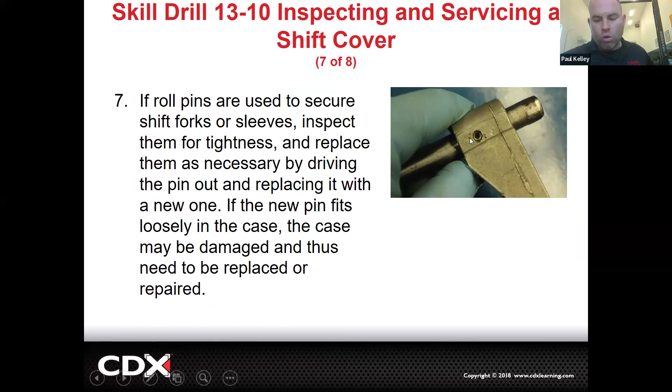If you had to change an actual shift rail or a shift fork, you'd have to drive that roll pin out - remember, that's with the pin punch. Inspecting the forks, inspecting and packing the bearings, installing a new needle bearing, installing spacers - keep track of these spacers. If you were to not use this spacer, you'd end up with excessive end play. Just remember that.

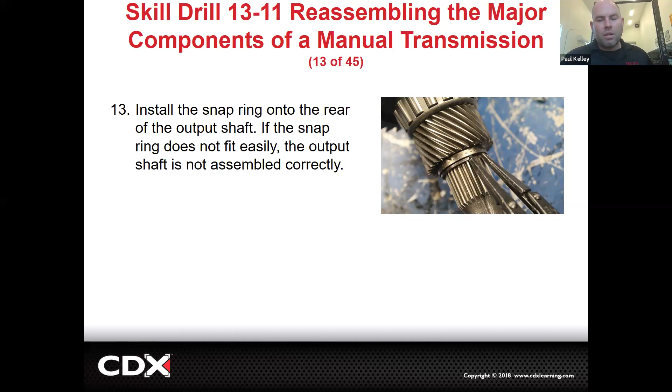Now you're basically reassembling - reassembling the main shaft, pressing, sliding, pressing. You're going to follow along with what service information says, but a lot of this is sitting over at that press, pressing stuff together and putting in snap rings. It's very different work than an automatic.

But some of it's very delicate - making sure these keys are in place, making sure the springs are sitting down in there, making sure your speedometer gear goes on, making sure you have things lubricated like where the bushing's going to go. It's not rocket science, but you've got to be paying a lot of attention.

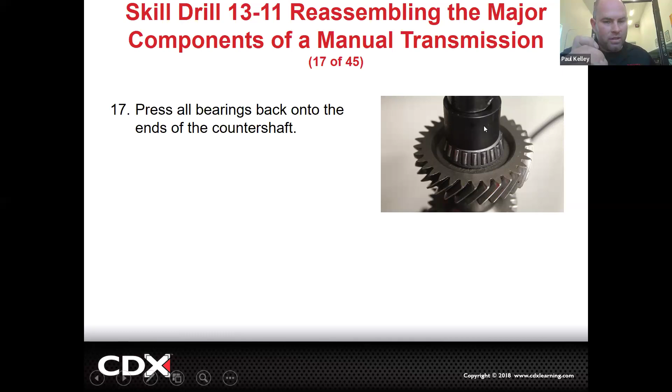Pressing bearings on - this is pressing a bearing on with the correct press. If you were to press a bearing with a press that's too big, it's going to ruin these rollers and the cage. You need to press properly. If the inner race is pressed onto the shaft, you need to press something that fits the inner race, not the outer race. Make sense? A lot of it's press knowledge.

It does actually have you press the shaft back into the case on this particular model - that may not always be the case. Did you see anywhere where someone was swinging a hammer and banging these things together? Sometimes for fun I call the hammer the swing press, but in reality, no. These are meant to be installed with an installer or a press, not beat together, not bang and bang and bang, right?

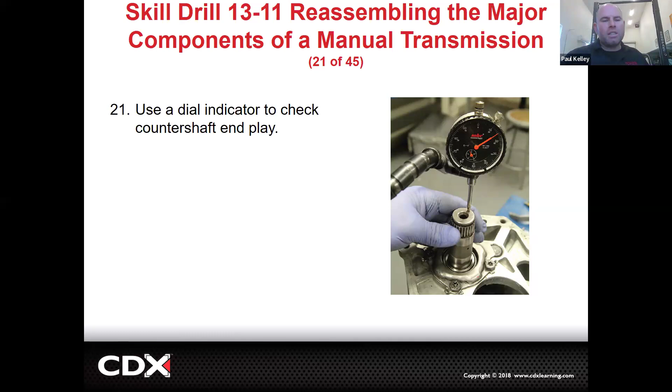Then at the end, look what we do: set the dial indicator on the countershaft, and we're going to move the countershaft up and down. If we forgot one of those thrust washers, what would this measurement be - too high or too low? This would be too low right here, this would be too high. If you forgot a thrust washer, there's going to be too much play - you're going to have an end play measurement that's high, it's going to be excessive end play. That's why we measure that, making sure everything is good.

If it's not correct, by the way, you might actually get a different size shim. If it's too much play, you need a thicker shim. If it's insufficient clearance, you need a thinner shim - not a big deal. And then sometimes they even have locking tabs, making sure these last few things are in.

The main thing is getting that main shaft in and set right. And sometimes these bearings need a certain amount of shims to get the correct preload.

So like what I was saying, remember how we have those teeth that are cut at an angle? Remember some of the positives are they're quiet, they're still pretty strong. The negative is one shaft goes this way and one shaft goes that way.

Well, what we'll need to do is put a set of tapered roller bearings, and you can see how this one's facing out like this. We'd have another one facing the opposite direction. So that way, when this shaft tries to come this way, this tapered bearing being up against a race can withstand a lot of radial force, but it can also handle a lot of axial force as well.

However, to work, we need a set. We need one facing one direction and one facing the other. So on the other end of the shaft, there's going to be one facing the other way.

And the thing is, anytime you use tapered roller bearings, those need a bearing preload. It's not like a ball bearing where it's automatically just in place and it's done. We actually need to set a certain amount of tightness, preload, on that bearing. And that's why those shims are so critical too. That's going to set the correct amount of preload.

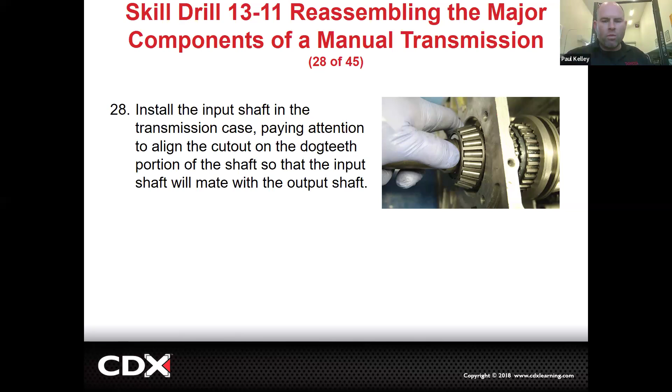But think about that. If your shaft were to move, but your rails were to stay still, and your rail has the fork, and the fork catches the sleeve, but your shaft were to move, can't you see how excessive end play would cause pop outs? Excessive end play would cause it to pop out of gear too. That's part of why our rebuild includes that measurement. It's so critical. So a lot of good stuff.

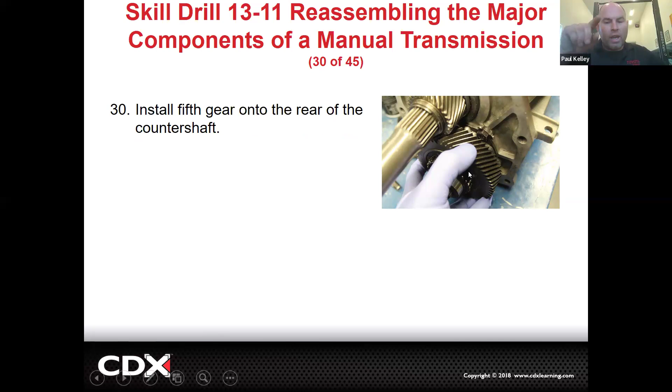The bearing retainer. When we install the fifth gear, sometimes it slides on, sometimes you have to press it on. Sometimes the shaft is hollow and threaded, and you can use a bolt as an installer and pull it on there. A couple people got to see that yesterday.

So that's overall new snap rings. This is pretty much the type of work you're doing. Then you're going to get your RTV or whatever it calls for, FIPG, RTV, anaerobic sealant, whatever. And it's going to tell you how much, at what size bead, and how much time you've got to work with it. And then you've got to get it on, get it torqued, and then it won't leak, assuming you've done a good job installing all your seals, etc.

Right, so same type of thing. You can see the input shaft, output shaft. Now this is the summary, all right? Because I threw a lot of stuff at you.

But you have to know what symptoms would relate to what parts, right? So let's say oil leakage, simple, like faulty gasket, faulty sealant, faulty seal. But even further than that, if you had, let's say, an output shaft seal leak, it could be the seal, but it could also be the surface of the output shaft, remember? If you had an output shaft seal leaking and the drive shaft slip yoke would move because it was loose, a new seal is not going to fix that. That could be a worn extension housing bushing. The bushing needs to hold the shaft, and if the shaft is sloppy because the bushing is worn, that's going to leak.

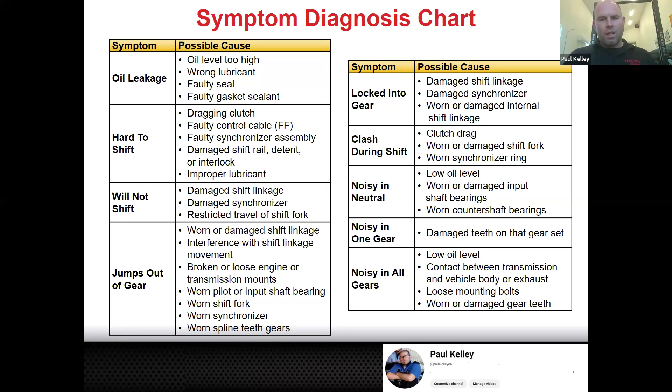But generally, like this says, if you have a hard to shift, check for clutch pedal free play, check for air in the lines, check the clutch disc. And then if that's okay, unfortunately then you're into the transmission or transaxle. But we check the externals first—don't yank a transmission or transaxle out if you didn't check the clutch pedal free play, or if you didn't check to see if there's air in the clutch release system.

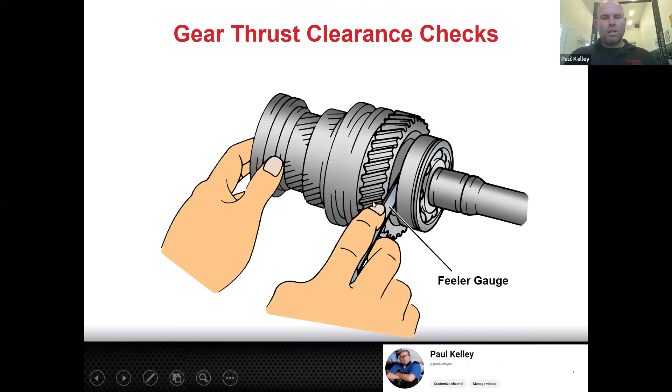Makes sense? Cool. And then similar, if it pops out and you're already in the transaxle, you're going to check various things inside it. I'd probably check your shift linkage first, of course. And then this is talking about if we have thrust, you can actually measure with a feeler gauge when we're trying to move it—sometimes they have specs to make sure there's a certain amount of clearance right there. And then checking the shift fork.

Cool. And then probably the thing I want to make sure you understand is with pop out of one gear, you're looking at a back cut problem more than likely. Makes sense? If it's something to do with the rail, if it's popping out—if it's an issue with the ball and spring, that's going to affect 1-2 or 3-4. But if it's just popping out of first, that's why I told you the story about my plow truck—it's probably more like the back cut on the sleeve or the back cut on the speed gear dog teeth.

Feel like you're decent? There was a lot of stuff to cover. I tried to cover as much as I could quickly, highlighting the important points. You guys got any questions? Hit me, what you got?